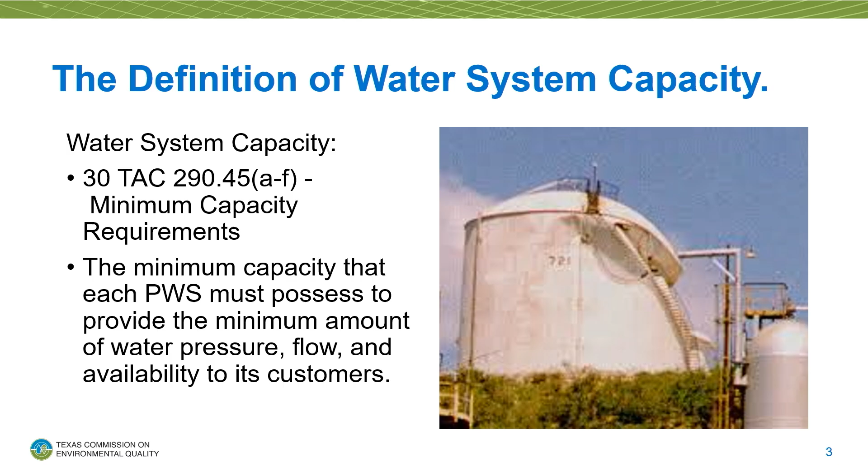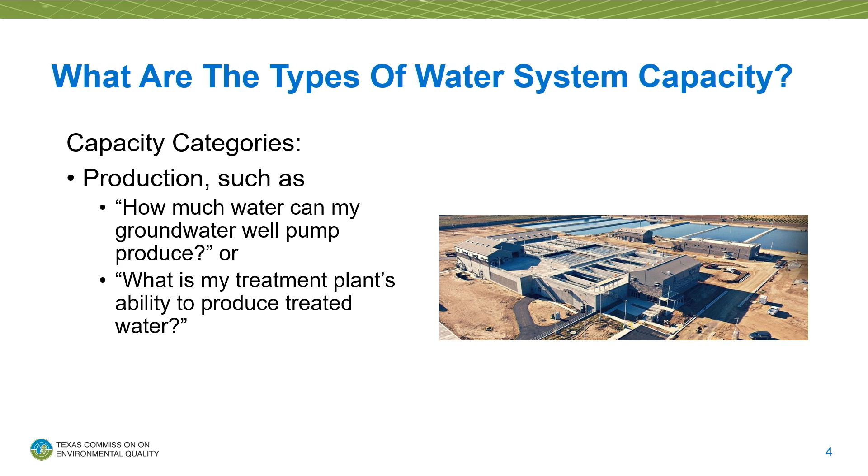Most capacity regulations are dictated by the type of water system you are, whether you're community or non-community, and then further defined by your water source type, whether you're surface water, groundwater, a GUI, etc., and then lastly by the number of connections you have. So what are our different types of capacity that we worry about? Well, first one is production. This is a combination of groundwater well yield, treatment plant production, and any purchased water contracts with another PWS, including emergency connections and trucked in water and that sort of thing.

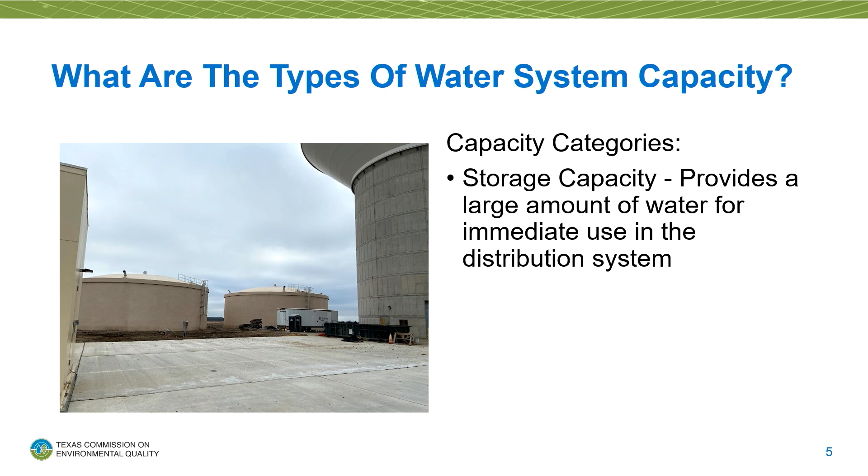So another type of system capacity we focus on is storage. Now this can be ground storage tanks or elevated storage tanks. Ground storage tanks will provide a supply of water, but by definition, they don't necessarily provide pressure for distribution, while elevated storage provides both storage and pressure. The next type of capacity we worry about under the regulations is for pressure tanks. If you're using ground storage tanks instead of elevated storage, you need hydropneumatic pressure tanks. We use these to stabilize pressure in the distribution system.

They're used for water hammer and a number of other things, and in some cases, they're used to be a big paperweight if we neglect them. There's some good stories there. Ask me after hours. However, despite these things looking like tanks and containing water, they don't actually count towards water storage capacity.

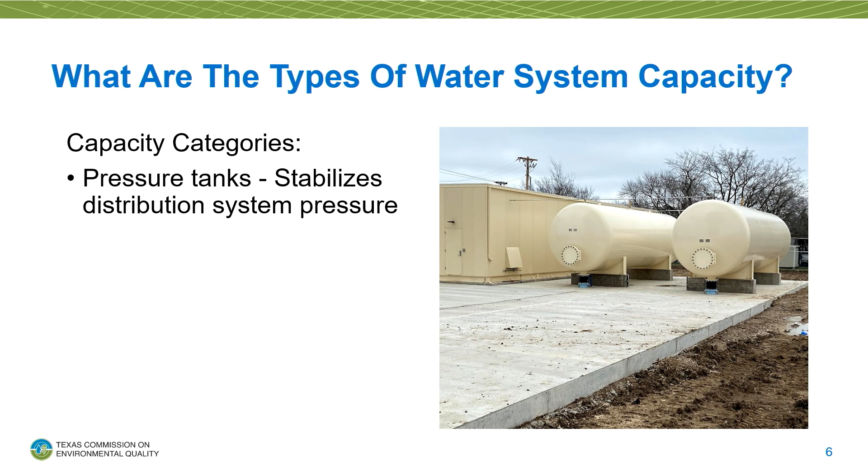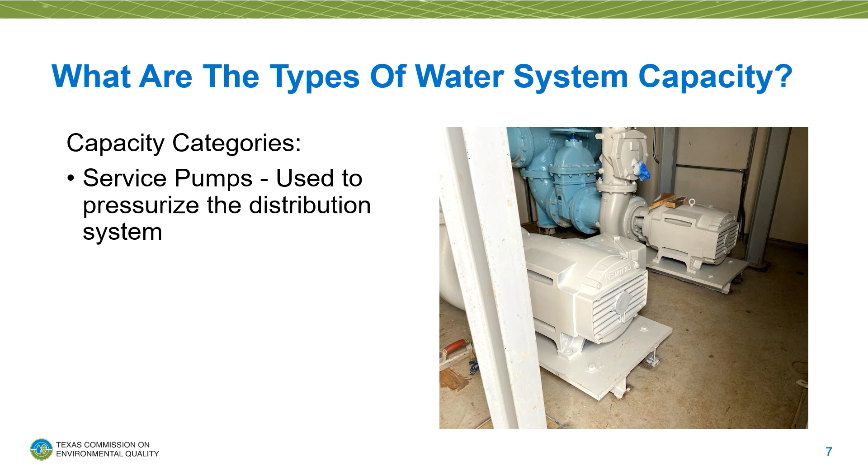Lastly, we have service pump capacity. Now, this could be high service pumps at your treatment plant. This could be booster pumps within your system. Typically, these are going to be used to fill elevated storage, or they're going to pump water from your ground storage tanks, unless it looks like the one on the other slide, which is hopefully out of service by now. So, now we know what our system capacities are, how we look at it under the law.

Why does it change? I spent a little over 2 decades in water treatment, and I've seen a lot of things happen at the regulatory level and then in terms of people moving here. And one of the supervisors I used to work under, I asked him one time for an SOP, and he said, well, we have SOPs here for pretty much everything, but the only thing we don't cover is the one thing that never changes. Everything changes. And in our world, nothing stays the same, except everything changes.

So, why do our system capacities change? Well, number one, things get old and they wear out. Eventually, not even the best operator can keep them running forever with baling wire, coat hangers, and duct tape. Further, Texas is a great place to live, and now everybody else realizes that, and they've been moving here. Lastly, state or federal government produce new regulations that can affect your effective capacity or treatment capability.

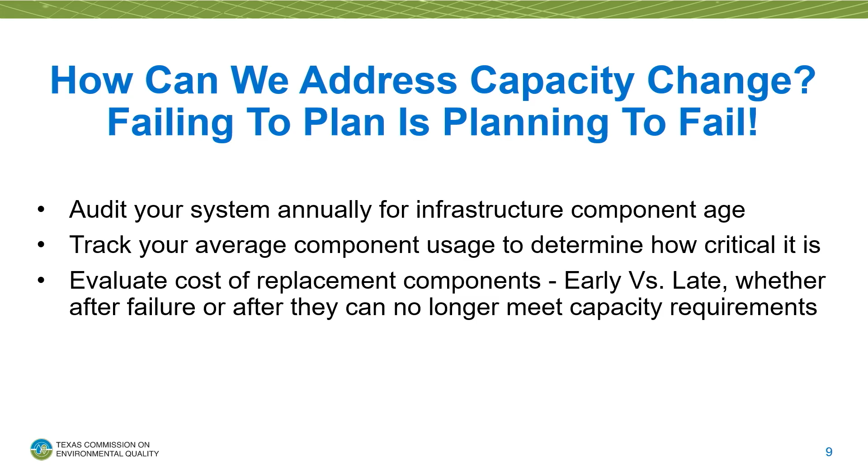So how can we address these changes in our water system capacity? I'm sure you've heard it before, failing to plan is planning to fail. There's a lot of these changes in growth in Texas that caught a lot of us unaware. I'm from a small town in northeast Texas called Greenville, and I currently live in a small town called Alpine. In both cases, we've seen a tremendous amount of growth out there, and you don't have the infrastructure, you don't have the tax base, you don't have anything to support all this growth. And overnight, you've got a ton of demand. And then overnight, you realize that you have all this infrastructure out there that's been aging, and you're kind of waiting for the money to just magically appear and replace it all.

So what do we do? Well, to the best of your abilities, plan it out. Perform annual audits on your infrastructure components. Look over each pump, motor, tank, or groundwater well, as applicable, at least once a year. Review each part of your public water system. See how much it gets used. The more something is used, the more important it is. And the more important it is, the more important that you have a replacement plan or an upsizing plan in place. Next is investigate the cost of replacing components.

Most finance departments, budgeting specialists, and analysts like to track these things so that they can fit them into your annual budgets. If you think you're going to need a new pump, tank, or even a whole water plant, it's a lot easier to save that money over time than it is to drop all that money at once. Lastly, something that I enjoyed doing in TEEX, TRWA, and TWA classes was to network with other operators. Find out how they would address some of the same problems. There's a wealth of knowledge out there in this state in terms of operator knowledge.

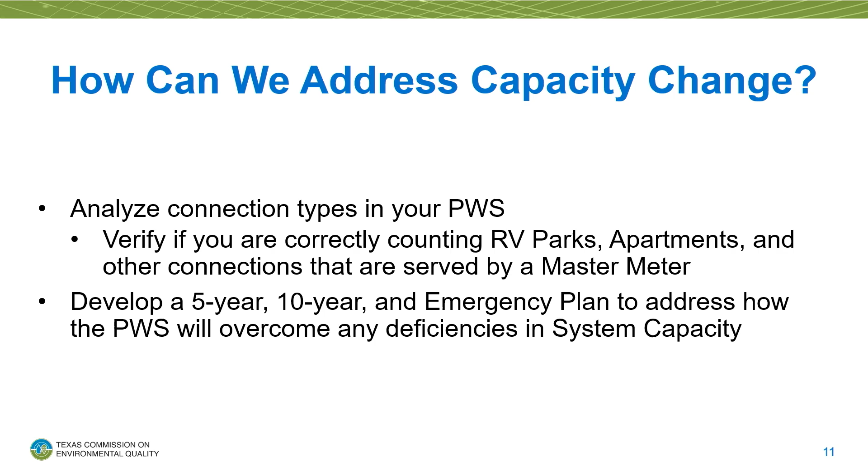However, if your RV park is its own PWS and not within the confines or the CCN of an existing PWS, SB 594 does not count. Okay? That becomes crucial for some systems where they're having to go back and count every apartment, every condo, everything as a separate connection. This is a way that might actually lower your connection counts and lower your mandatory system capacities. So again, develop a plan on how you'll address failures and deficiencies and shortcomings in your PWS. Most importantly, focus on the future and unplanned emergencies. Remember, Murphy wasn't a lawmaker, but they did name a law after him.

So, start developing a plan based on your findings. Well, this is a really difficult thing to do in any water system. It doesn't matter if you're a MUD, a SUD, a city, a district. You are the licensed operator, which means your customers depend on you to be their eyes and ears regarding public health and safety. If they don't know what you need, they can't give it to you. Okay? You have to communicate these things.

Help your city council or your board members understand what a critical system failure would look like. That sometimes helps them understand how important it is to develop a plan for getting the money together, give you the components you need to keep your system running.

Further, talk to others in your organization. Tell them what you have, tell them what you found, tell them what you need. Be transparent. Remember, these other folks may not be operators. They may not know anything about the water system. That's what they rely on you for.

So now we're going to talk about, obviously, the most important resource, time and money. Because everybody has a lot of that, I'm sure. So everything can be solved with the proper application of time and money. And I'm sure every water system here has a ton of time and money. So if there's a sudden change in your system capacity and you need time and money to address it, where can you find time or money?

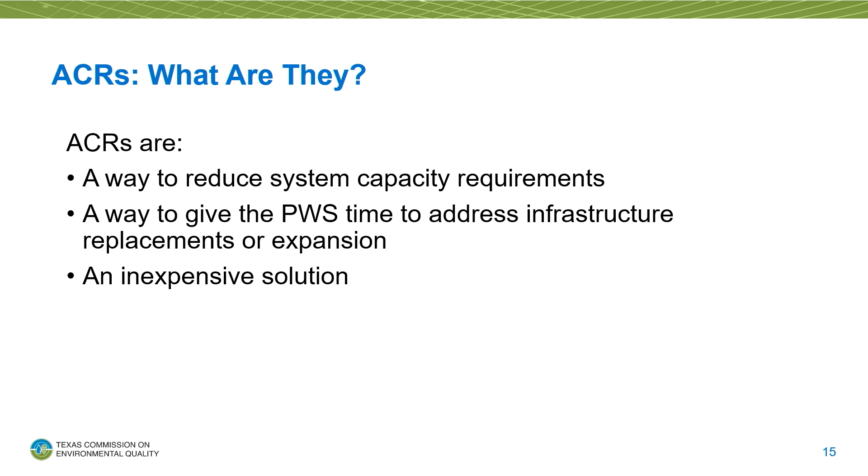So what's an ACR? An ACR, an alternative capacity requirement, consists of TROT staff, somebody that looks like me, reviewing your actual water usage per connection to determine if the minimum capacity requirements in the law are actually more than your system needs. If so, your capacity requirements can be reduced. Why put in new, larger infrastructure if existing infrastructure is still in good shape and is serving the PWS supply and demand?

What is an ACR not? An ACR does not fix anything. I will not come to your plant and repair your broken pump. It's a way to reduce regulatory capacity requirements of your public water supply. It doesn't change your demand. It changes your regulatory minimum.

It's not going to replace broken pumps, dry well, rusty water tower, or wake your operators up on night shift. It doesn't remove the need for a PWS to spend money to fix things that break. Further, an ACR is not a permanent change in your capacity requirements. It can be awarded, but it can be revoked if certain conditions are not met and maintained. So you go through the trouble of generating all the paperwork needed.

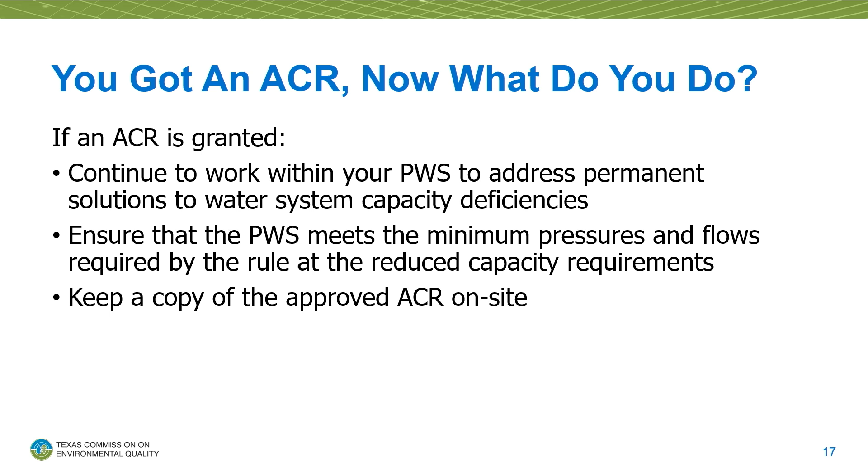You gather your info, send it all in, you get a confirmation email from us that it was received. Well, now what do you do? Well, the same thing all of us get to do when dealing with the government. You wait. If you're awarded a reduction in your system capacity, you need to determine your next step. Do you replace your failed, aging, or undersized infrastructure, find a way to pay for it, and then go tell all your water customers their bills are about to go up?

Or are you fortunate enough that you're now compliant with the rule and are done? If so, take this opportunity to go back to step one, develop a better plan for addressing the future. Because remember, we all want to leave our water systems better than how we found them. We want to pass them on to the next generation in better shape with a better plan for moving forward. The alternative is you got a letter that denies your request.

Now what? Well, all's not lost. We include instructions in the letter that we send you. It tells you what we need to go forward with another review. Read the letter, gather the info, resubmit. Worst case, call me and I'll read the letter to you. It happens more than you think.

So what else can you do? If an ACR was not a viable option, TCEQ has other resources to assist public water supplies in addressing their system concerns and shortfalls. For one, and I can speak to this one personally, the Texas Optimization Program team has a long history of helping water systems that are in dire need of evaluation, sometimes through CPEs and SPEs. The TOP, or Texas Optimization Program staff and contractors, provide technical assistance to PWSs that are struggling with conventional or innovative treatment technologies and distribution system issues.